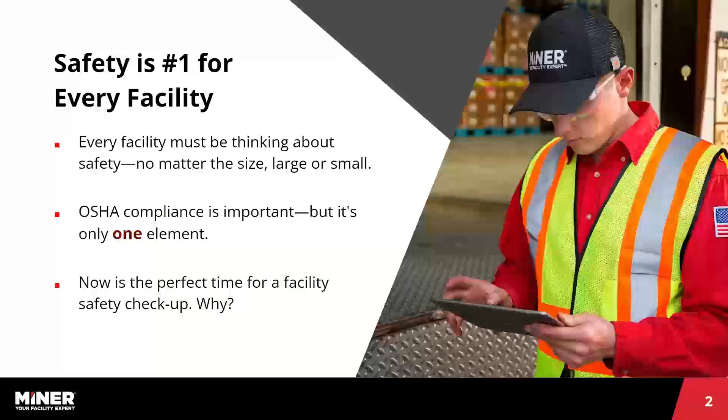And then really, when is the perfect time to do a safety check or just a checkup on your overall facility, and why, right? So what we've got to figure out as business owners, operations managers, and safety managers is when's a good time to get a safety checkup, and why would we do one, right? There's a lot of reasons why to do it, but that's coming next with Johnny. Johnny, can you take this slide for us?

Yeah, so this portion of the conversation is primarily wrapped around the value of loading dock safety. For me and my team, we spend a lot of time assisting architects, engineers, plant owners, and developers on how to design a loading dock or a warehouse facility in a way that's going to provide a safe environment for its employees.

And the loading dock is a major area and one of the primary areas inside of a facility where a lot of injuries occur. A $5,000 investment in the safety equipment can prevent an insurance settlement, a lawsuit, a hazard, someone falling out of the dock.

So a big portion of what my team does on the front end is to advise developers and end users on the best way to create a safe loading dock early on in the process, where it's much cheaper than it would be to try to do it retroactively after an event has occurred. So while it's an investment on the front end, it should also be looked at from a savings perspective as well, because you're going to prevent a lot of safety issues from occurring if the proper equipment is included in the facility on the front end. And we'll get into a lot of what those types of equipment and best practices are here today.

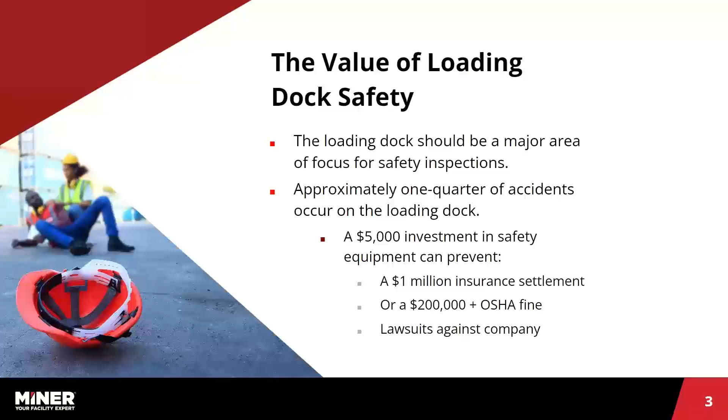So really, what is OSHA looking for in loading dock safety? We just highlighted some things here that we thought were relevant. There's a lot of incidences, like Johnny was mentioning, like 1 in 4 accidents happen at the loading dock. That's a statistic from OSHA that's been out there. It's probably getting a little bit worse, but it's around that metric.

And then really, they're looking for clear paths and visual warnings. So making sure the warehouses are lit and bright, and there's actual guides and railings and walkways and all that kind of stuff. Making sure that forklifts are used effectively, especially around the edge of dock where there's a 4-foot drop off, which we'll talk about and what that OSHA standard means.

Just making sure the dock plate integrity is good. There's a lot of cases where welds are cracked, concrete broken behind the rear hinges. There's also bumper damage where the bumpers have come off, and then trucks hit the wall, break the equipment, and then you have dock plate issues that can cause safety issues where people are pulling lips of dock levelers out with their fingers and forklifts driving them down. So I think there's some of that for sure.

Ladders, making sure people aren't jumping off the dock. It's 4 feet from the floor to the ground. So that's a 4-foot drop, and you know how it is. We're not as young as we used to be, some of us, and you can't just jump 4 feet and not expect to get hurt.

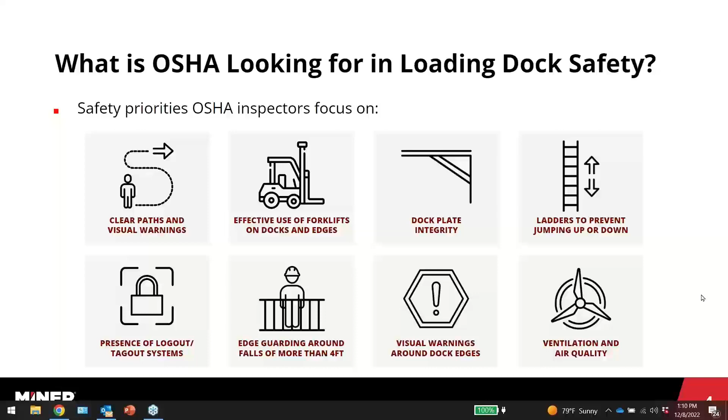JP, can you handle the safety part on doors for us? Absolutely. It's funny that you mentioned the 4-foot drop off. I actually worked for a company where I saw an employee jump off the dock, and he blew out his knee and was out quite a bit of time. So silly little things like that can lead to some major lost time for companies.

I'm going to talk about the doors. You have your loading dock doors, and there's 3 specific types that we typically see in a warehouse application. You have a sectional door, a rolling steel door, or a rolling sheet door. Kind of the 3 standards. You also have security doors and man doors. Then you have the dock seals that go on the outside of the building to create a good seal for the truck as it backs up.

One common thing that we see in doors is they have springs, and the springs relax over time. What that does is it allows the door to start creeping back down. You've got to have maintenance on your springs, constantly tensioning them, lubing them. Rollers get hung up. There's just a litany of things that can go wrong with the door, and that's when injuries happen, and that's when damage happens. If you can imagine a door floating back down an opening, and you've got a forklift running through the opening to go unload a truck, and the door clips the top of the forklift, and boom, now you've got a down door.

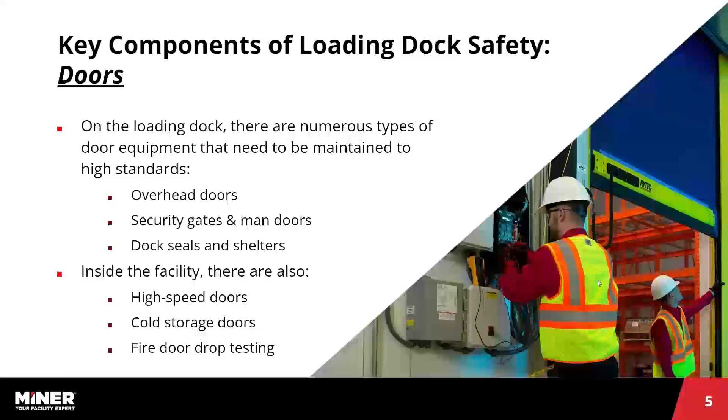Talk a little bit about vehicle restraints, what they are and what the benefits are. Yeah, absolutely. A vehicle restraint is a device that holds the truck to the building. It used to be in the industry that truck drivers back up and chock their wheels, and that keeps the truck close to the building. There are a lot of risk factors with semi trucks backing up to your building and the unload process with your people on forklifts or pallet jacks.

Ultimately, these are designed to keep the truck engaged to the opening until the load or unload is complete. There's a lot of trailer creep. Sometimes a trailer could start moving away if it's not restrained to the building. As you're going in and out at a high rate of speed with your forklift, all of a sudden the leveler could disengage from the semi truck and the forklift could hit the ground.

I've seen truck drivers drive away during unloading with a forklift in the back of the truck, and the driver had no idea the guy was still there. He thought he was done, and you've got an employee backing up who could fall to the ground. Forklifts are heavy, and this is a very scary accident within a facility, and I've seen a couple. Usually it takes a big disaster for a company to say, we're going to do this at every single one of our facilities. We just hope we can avoid these disasters and make sure everybody gets home safe.

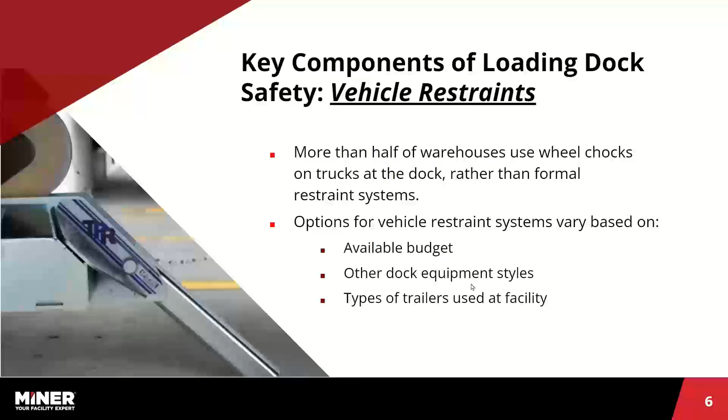It was really good. Johnny, can you help us understand the edge guarding and what this means today and what OSHA is doing with that? Yeah, so the two primary purposes for the edge guarding are, one, to prevent personnel from falling off of a 48-inch dock high facility, or also driving a forklift off of the facility. And there's several different ways that you can defend against that. If you have powered equipment, specifically hydraulic units, there's an option on those levelers called a safety barrier lip. That is a function of the lip that actually extends above the dock height at the edge. So it would prevent a forklift from driving off the edge if it's in the stored position.

There's also other things such as guardrails, mesh barriers, chains that would extend across the door or the dock opening in the event that the door was open, to provide some form of barrier. In addition to preventing things from leaving the facility, such as forklifts and people, these types of things also defend against unwanted guests coming into the facility as well. So while it's a safety issue on one hand, it's also security for the employees working inside of the facility on a lot of occasions as well.

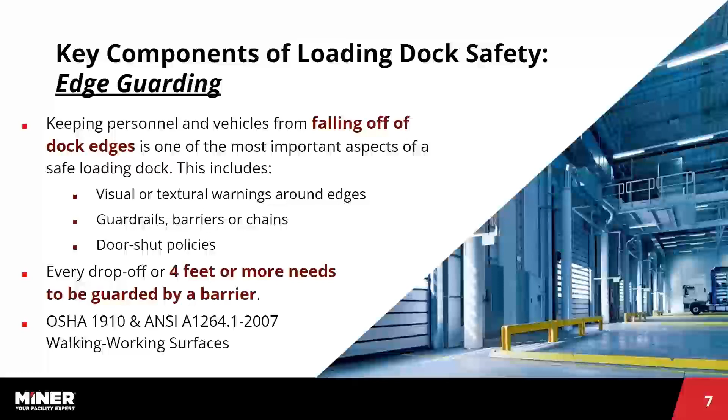We're going to talk about ventilation. A lot of facilities leave the door open for air quality improvement, and certainly that's important to maintain worker focus inside of the facility. But it also presents a lot of risk with humidity coming into the facility, and also personnel coming into the facility that shouldn't be entering through the back. They should be coming through your normal security process in the front of your facility. So, with the ventilation at the loading dock, air quality improvement is a big thing, temperature control, and then obviously humidity mitigation, as you can see here.

And the way to defend against that is HVLS fans. Just the breeze alone from an HVLS fan is something that's more meaningful to employees, and this is through a survey that we've performed. The constant breeze of feeling a fan blowing on them was actually much more beneficial and provided a better work experience than just working in a cool, air-conditioned facility. So the HVLS fans provide that. They also provide a way to mitigate floor moisture that could ultimately result in forklifts losing control inside of the facility, and slips, trips, and falls with employees working. And it just creates a much better work environment for the employees as well.

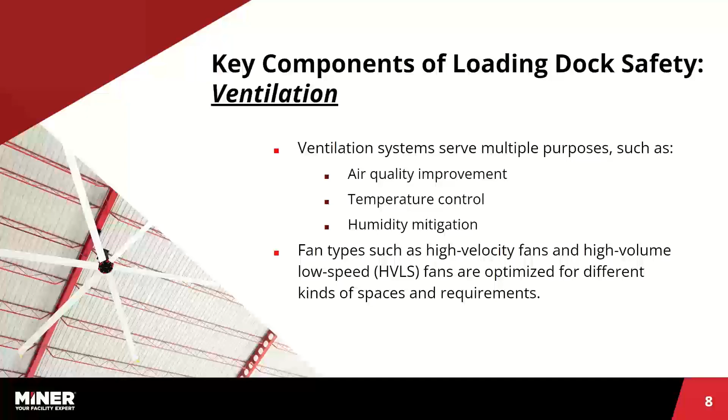Dennis, if you can keep going. So the clear paths and racks: everyone's been to Home Depot and they see, when a forklift is in an aisle, in most occasions, they're blocking off the 2 aisles adjacent to that aisle, so that if anything were to get knocked off of any of the adjacent aisles, it wouldn't hurt employees that are working on aisles where there's someone actively trying to unload things off of a rack.

So clearly delineated paths for vehicle traffic and foot traffic is a huge must. We've seen it quite a bit across the country where facilities are designed without the pedestrian in mind. Facilities in large part are designed with making sure that forklifts have a clear line of sight and travel path, but nothing really delineates where pedestrians are supposed to navigate throughout the facility. So providing guardrail and clear floor markings on where these employees are to navigate inside of the facility where you have forklifts working is a big thing.

Also rack protection. There are a lot of really cool videos out there of forklifts running into pallet racking inside of warehouses and the domino effect occurring when they damage one of the legs on that racking. And one option there is to provide floor protection around a lot of the racking, just so that if a forklift were to get near the racking, it would prevent it from actually engaging with the rack, and also prevent the domino effect of collapsing rack inside of your facility.

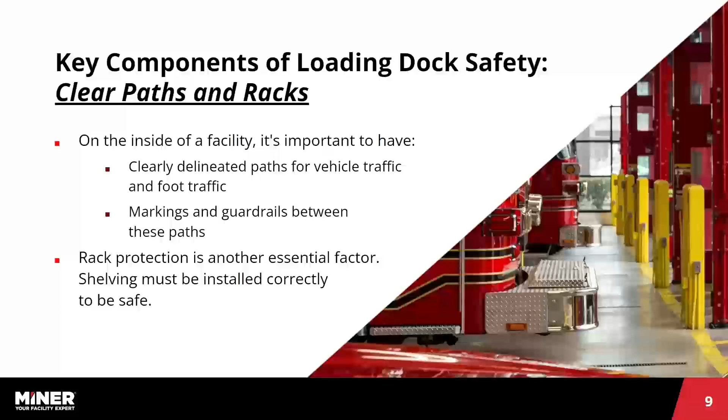The next topic is primarily wrapped around the dock levelers themselves, and I mentioned a minute ago safety barrier lips that are an option on hydraulic equipment, and this is a really important component to safety because it prevents forklifts from being able to drive off of the dock in the event that you're using the dock door as a means of ventilation inside your warehouse today.

Since vehicles and people travel over the equipment, it's very important that the application be correct. In a lot of cases, there is what is referred to as a contractor grade dock leveler that gets installed inside of a facility just as a means of providing some form of transportation or bridge between the warehouse floor and the truck. However, if they're misapplied and undersized, you could get a significant amount of cracking along the structural welds, not only visible at the top of the dock, but most importantly, you can start to get a lot of structural cracks underneath the dock leveler.

And this sort of plays back into some of the proactive maintenance conversation that we've talked about today. We've got to get to a place in the industry where we're not only visually inspecting things from the surface of the floor, but also bringing in technical people that are skilled and trained at being able to evaluate the condition of a dock leveler, and also, taking it back a step, ensuring that on the front end, when we're designing facilities, we're taking into consideration the gross vehicle weight of your forklifts, the size of load that you're carrying, and ensuring that the dock equipment going into your facility will accommodate those weights.

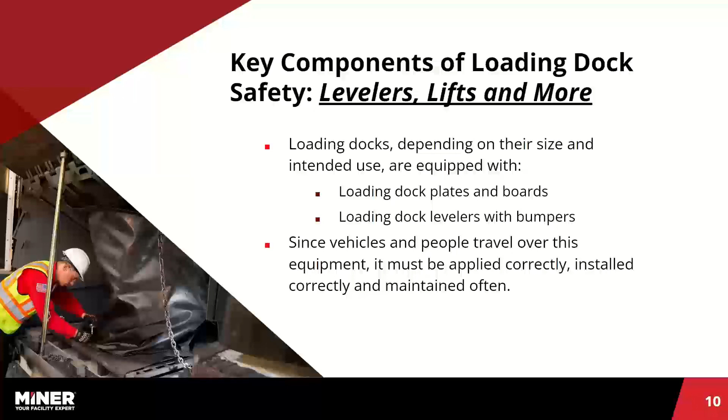I appreciate that. Yeah, let me just add to that real quick on the three-wheel forklift. On a three-wheel forklift, a lot of the weight gets distributed to the center back wheel. And forklifts are one size, and they typically drive over the same area of the dock leveler when they're driving into the facility.

So over time, when Dennis mentioned the dishing effect, if it's undersized and it's not designed to accommodate that third wheel, you have a large point load on the back of your forklift, and so it's going to create a dish in the dock leveler where it drives over it consistently, ultimately compromising some of the structural integrity on the bottom of the leveler that you can't see from the top looking down, right?

It's going to be noticed through a proactive maintenance program or something along the lines of performing visual inspections underneath the leveler. Good point.

The next point here is the cleanliness and organization of loading docks, keeping spaces clean. Some of the best practices that we've seen through a lot of our customers across the country have been trash bins at every dock position or every other dock position, just to create some awareness around, if you see cardboard on the floor, ensuring that it gets picked up and put in a trash disposal and not on the floor where someone could slip.

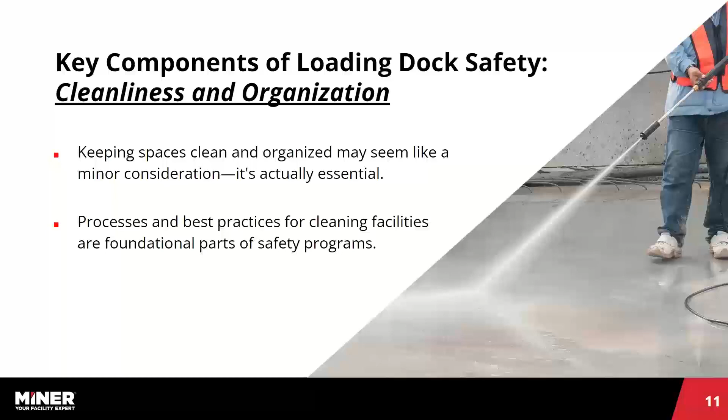So that's a really big part of keeping warehouses clean and organized. And the other thing is everybody works better when they're working in a clean and organized environment. It increases productivity, eliminates the risk of safety hazards, and just overall creates a better environment for working. Yeah, good housekeeping is good safety. That has always been my mindset there.

We talked a little bit about this, won't spend too much time, but whether large or small, safety needs to be a priority. And really ask yourself this question: can you afford a lawsuit from somebody breaking an arm or getting severely hurt? Can you afford the insurance premiums? Word of mouth gets out. Can you afford people leaving the place they work, right? It's really difficult to replace people, to train people.

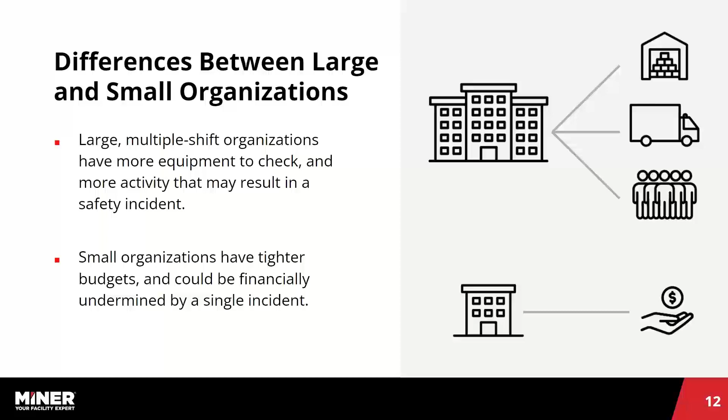And so making sure safety is a priority, regardless of the size of your organization, is absolutely paramount in today's day and age. And then why we use advanced data-driven safety checks, right? Because there's plenty of regulations right now, whether it's OSHA, American Institute of Baking, Food Safety. There's people coming in making sure that things are sanitary, making sure things are safe. Those things are super important today.

And really, the issues that interfere with safety and compliance are so many, right? The high speed pace of an operation, pallets per hour into a truck, lack of communications, no lights, no mirrors, no activation signals. And when you get into some of these larger facilities, you're starting to see more of these communication signals and different opportunities to enhance communications to alleviate safety risks, right?

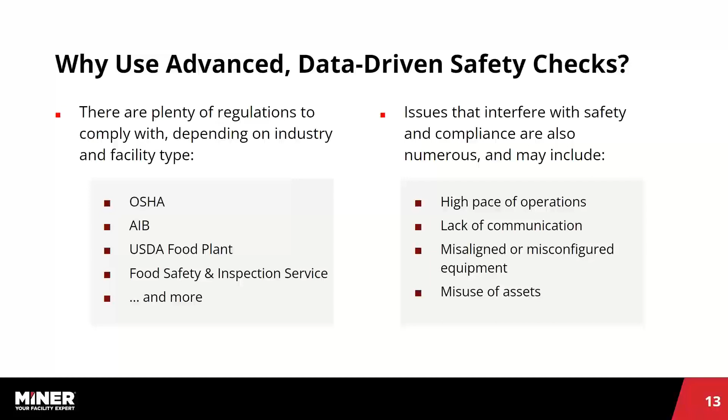So making sure those motion sensors are set to pick up the right mass so the door opens and it doesn't close on somebody walking through it when they shouldn't be. The misuse and abuse of assets happens every day. And making sure that you have that data-driven safety check where someone's coming in and double checking the condition of your facilities is super important today. And I think the best way to do it is through safe checks, which is the new way to do dock surveys.

And these are assets that are captured in an app that is basically utilizing electronic evidence and data and the DNA properties of your facility so that you can get a real-time completion of what this looks like. And it just gives you your own customized website with a condition per asset, per spend, per repair needed, all of that stuff. And if you don't know what you have, this is another way to kind of get, like I said earlier, the DNA of a 6x8 leveler, a 9x10 door, a 12x12 high-speed door.

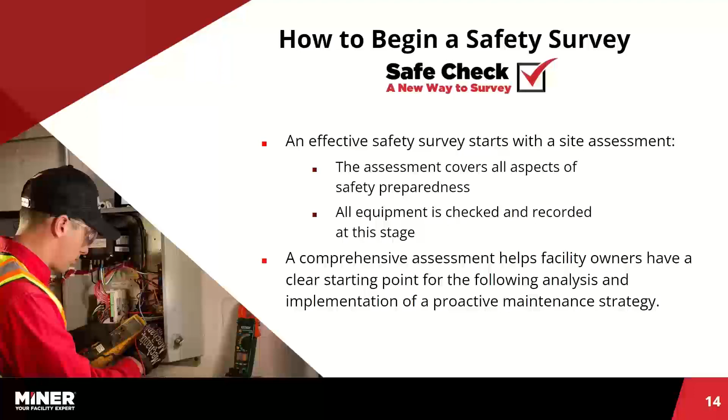One of the things that is pulled from these surveys as well is fans. We had an incident where nobody did any maintenance on their high-speed fans and a blade flew off. Didn't hit anybody, thank goodness. But again, those are the things, making sure those bolts are locked down. How often do your maintenance teams get up on a scissor lift 30 feet in the air and check the bolts on fans? So these are the kind of things that are out there. You just got to make sure you ask for it, and people will come out and effectively give you a current condition on your facilities.

You know, there's different ways to do it too. There's a standard dock survey where people will come out, they'll write it down on a piece of paper and they'll say this, this, and this. It takes a long time. It's not streamlined, but it could give you an idea, right? But there's also the Safe Check, which is a really unique one in its class. There's nothing else like it out there that generates the data, and then you can make decisions on data. And the other cool part about it is it could be barcoded and it could be asset tagged.

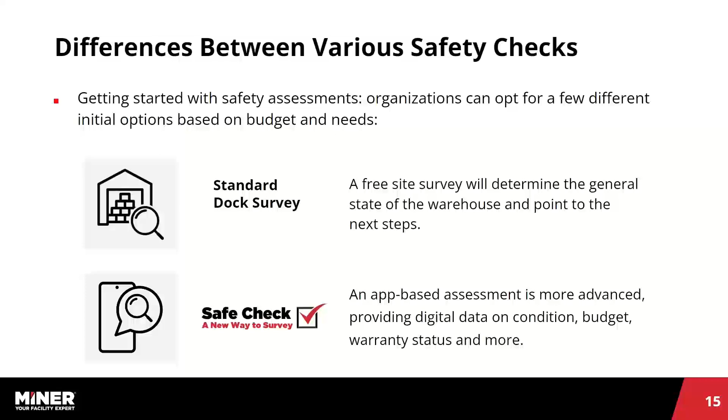So if you ever want to scan that barcode, you could say this door has been maintained. This door, we've spent $10,000 on this door. Maybe it's time just to budget for a new one. Or, hey, listen, this is a direct run from one side of the facility right into the dock, into the door. And maybe there's some sort of parameters of safety that we can build in to alleviate some of this on the one or two positions that are having the most issues. So it helps with the data, it helps with root cause analysis, it just helps with decisions, and it's customizable so that you can have your own personalized website.

Hey, Dennis, one point on that I just want to add. Yeah. This applies not only to existing facilities that are currently in place, but if you're designing a new facility or looking at acquiring or building a new facility, these are things that you can do on the front end, depending on the type of dock equipment that you're wanting. It's a best practice to try to get this stuff built in on the front end so that you understand the condition of your equipment when you get there.

And if you're in a lease environment, you have documented electronic evidence on the front end of the condition of your equipment, so that if you do have to move out of that facility in the future, you have electronic evidence and a well-documented proactive maintenance plan that could prevent you from paying some unwanted costs as you move out of that space. Yeah. I think the other thing, Johnny, is once a year make sure you got this in place. Even if you put a new unit in, you'll have the data up front, but then you can have that tracking year over year to make sure you're getting the 10, 15 year life cycle of the equipment that you're supposed to.

JP, you want to jump on this one? Yeah, I sure do. So you guys just spent more time on the Safe Check piece. I'm going to start out on the standard dock survey. Why I think this is beneficial to a lot of our facility owners and maintenance people is it's a free site survey that Miner will come out and do for you. What it consists of is one of our sales reps coming out to do a walkthrough. They're going to do a visual inspection of all your equipment, whether it be docks, doors, fans, and get an idea of what exactly you have in your facility, what size doors, what capacity levelers. And it gives us the opportunity to walk through and look for any safety issues that may arise.

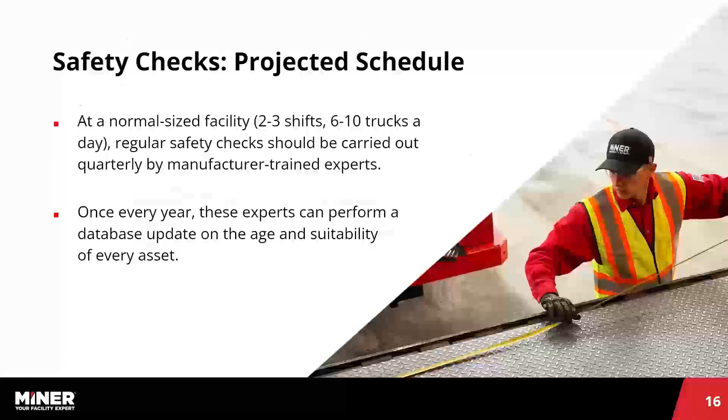Another one is the weather seals for a food facility. If you've got light coming in and weather seals hanging off, that's an entry point for rodents, and it's also a compliance issue. So that is something that Miner offers as a standard free dock survey. Come out, let us do the survey, and we'll get you a quote if there's anything that we see needs fixing.

Now the Safe Check is definitely a lot more of an involved asset tracking system. It has a lot of information. It's app based. As a customer, you would have access to see your assets in real time. You can pull them up. Let's say you're managing 3-4 facilities and you want to know how all your equipment's doing, or you're trying to plan for CapEx and you need to know how many levelers you need to replace.

You can go right into the app. You can pull it up. You can sort it by which ones are in the red, meaning due for replacement, and you can run that and plan for CapEx. And also see how much that piece of equipment may cost you per year, for 6 months. It keeps all that record. But you've got to get the barcodes on it, and you've got to get on the program to start capturing the data.

Because as Dennis mentioned earlier, data-driven decisions are becoming more and more prevalent in the workplace, and the more information you have, the better off you're going to be in the long run. Any questions on the Safe Checks, Dennis? No, I think that's good. All right.

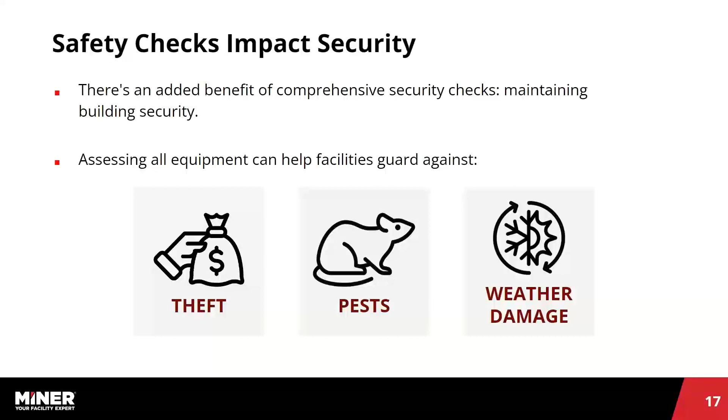Yeah, we talked about the security side and really helping alleviate if brush seals are bit through by pests, or you've got weather damage and you're trying to control energy cost, or just thieves stealing stuff. But this slide, JP, why do facility owners fail to create safe environments? What are your thoughts on this one?

Well, safety for me is a culture, and it starts from the top down. There is a mentality out there that, well, it's never happened here, or there's no reason for us to have fall protection, nobody's going to fall out, and that's the mentality until it happens to you. It's kind of like wearing a seatbelt. Well, I never get in a wreck, so I don't wear my seatbelt. But all it takes is one wreck, and it's the same thing with a safe environment for your employees. You're not just managing yourself.

You've got a lot of employees, maybe new employees that have never operated this kind of equipment or driven a forklift before. It's something culturally that I think needs to be driven from the management down, because safety is important. You can't just assume you're safe. You've got to make sure, and what better way to do that than bring in the experts to do an assessment and see if you're within the guidelines of what we consider safe, or what the industry considers safe. Worst thing you want to do is ever put an employee in danger.

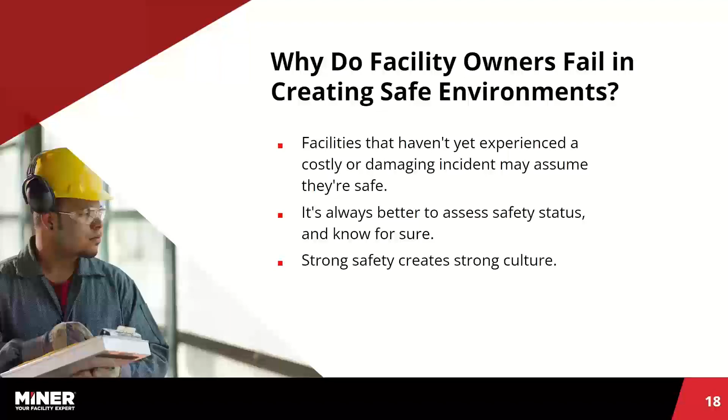JP, just to add one point there, in a lot of situations, especially if you have interlocked equipment with your vehicle restraint and dock leveler, in the event that you have trouble, you have the option to send a supervisor out to the warehouse and override the dock position so that it can be used. In a lot of cases, that override fails to be put back in the interlocking sequence it was designed to be in. So over time, if you have 50 positions inside your facility and over several years you've overridden several of those and haven't put them back in the correct interlock place,

you could have a situation where what you believe as a facility owner is a safe interlocked dock position, when in fact they've been overridden by supervisors in the warehouse over a period of time, and they're not interlocked. So you create an environment where you thought you had a safe dock position, but it's been overridden for whatever reason. So it's important to not only ensure that the dock equipment, the vehicle restraints, the seals, the doors are all functioning correctly, but also to inspect the interlocking of the equipment to ensure it's how it was designed and intended to be used as well.

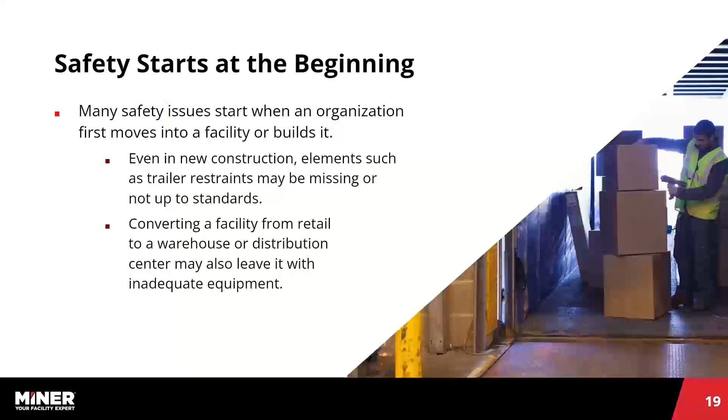Another thing, people move in and, at the end of the day, it's probably not the right equipment for your facility, but you moved into it. So why not have somebody come out and at least evaluate it? And this is how you get started with your own safety checklists. Like JP mentioned earlier, there's no obligation. We'll come out and do a free inspection. If you want the data-driven one with the asset tagging, barcoding, metrics, the customized website and electronic evidence, there's a fee for that, based on size and the accuracy of the location. So that's something we can look at as well.

At the end of the day, we didn't want to keep this too long, we wanted to make sure we left time. But these are the Miner care suite of solutions: Safe Check, which is the safety assessments, and Safe Act, which are proactive maintenance programs. We do national safety and national maintenance programs for companies all over the place. Wanted to make sure that we had that in there.